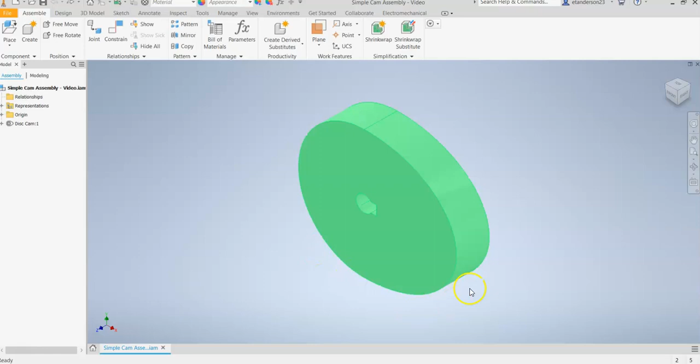We need the disc cam assembly, which should look like this. You need your lifter, and then you also need the cam case itself.

I've already opened the disc cam assembly. From there, I'm going to put some more objects in there to play around with. So I'm going to go to place.

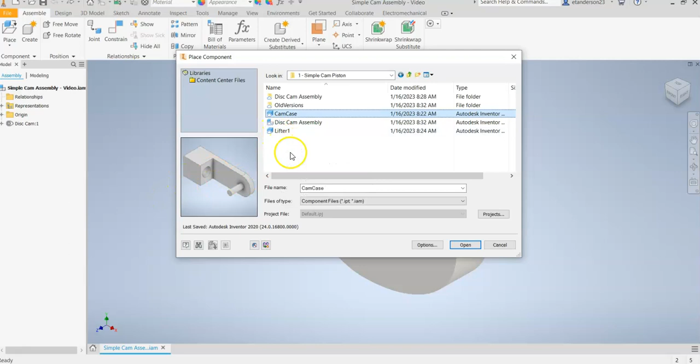I need to search for where I saved the cam case and the lifter. In your case, it should be under this PC, and scroll all the way down to your student drive. Because I don't have access to that, it's just in my Google Drive. So I'm going to click on cam case, and we can see an image pop up. I'm going to hold Control and click on lifter, and hit open.

That allows me to snag both of those at the same time. And then I will left click. I'm going to hit escape. So I have all my parts within the assembly itself.

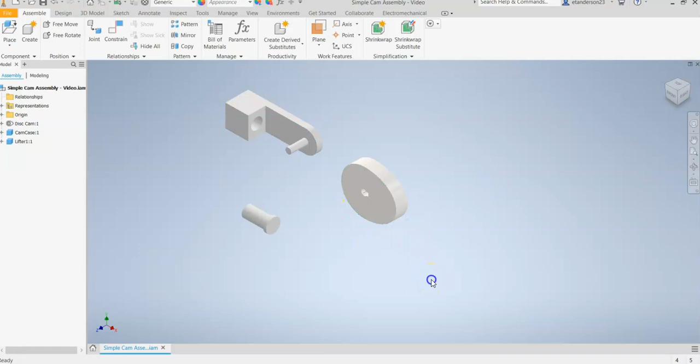Now, if you notice, if you grab these things, you can move them around. That's not the case for the actual disc cam. Now we want to be able to move it, so I'm going to right click on that guy and go to grounded. That's going to allow us to actually move that thing the way we want it to.

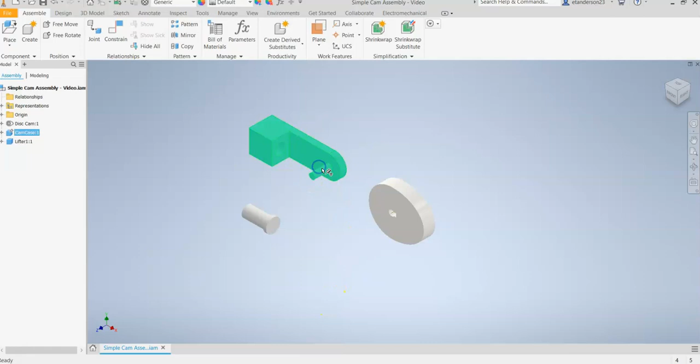Now for assemblies, you always want at least one of these things to be totally grounded. So I'm going to choose the cam case. I'm going to right click on that and click on grounded so that whatever I attach to it is going to be stuck in that spot.

So let's start attaching these. Kind of imagine this is going to be like a cheap version of a piston, where my lifter is going to go in and out of the cam case hole, and my disc cam is going to rotate around that peg right there.

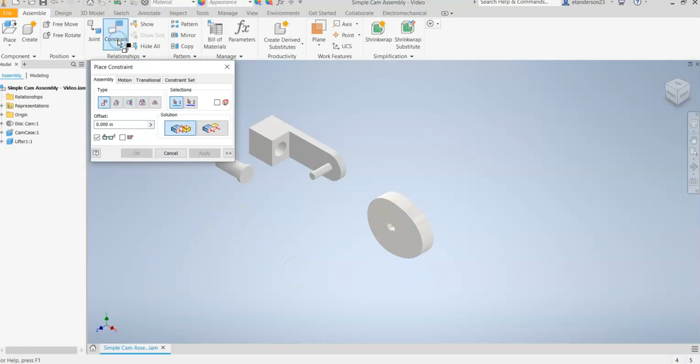So let's start off with going up to constrain, and I want to force my lifter to go inside of that hole right there. So I am going to highlight the edge of that until I get that nice little axis right there. And I'm going to lock it into the same thing on this side. I'm going to hover until I see that axis.

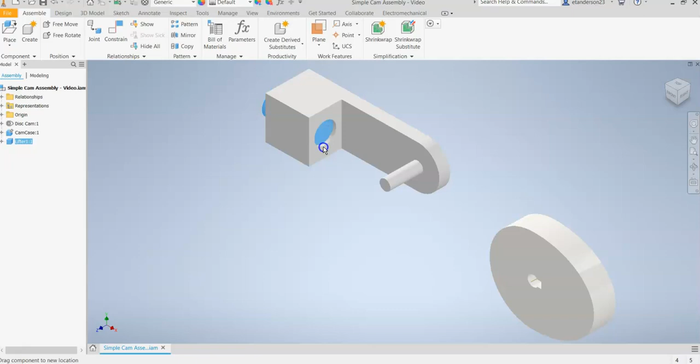And I'm going to say, okay, that works. Right? So my lifter can go in and out. It's not going side to side. Now, truthfully, it will go through, which shouldn't actually happen, but we're not super concerned about that quite yet.

Let's do kind of the same thing for our disc cam. I want that to go on this peg right here. So I'm going to click on the axis. I'm going to click on the inside hole of that keyhole, and notice it locks it right into place for me. That actually looks pretty good.

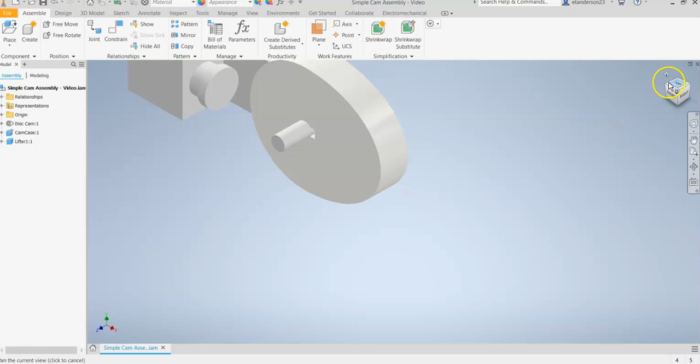So let's zoom out to my home view. Now we have a little bit of a problem because if I try to rotate this guy, there's a lot of give left and right because there's no constraint there.

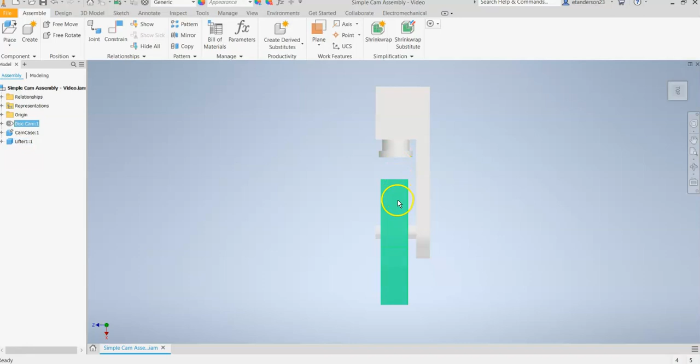So let's do another constraint. The goal of this is I want my disc cam to line up perfectly with that lifter right there, because I want them to come in contact with each other and actually be able to move and rotate.

So what I'm thinking is I'm going to get a constraint between the face of the case and the face of the cam. And when I select that, they kind of shoot together.

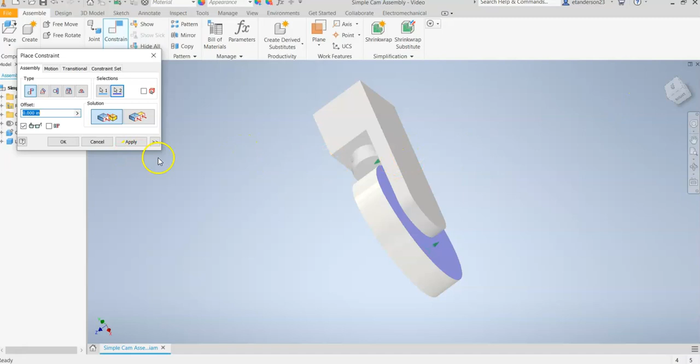But I can actually offset that so it's not directly in contact with each other. So maybe I offset it, like 0.125 or something like that. Just kind of eyeballing it so it's pretty close to being in the middle right there. And I'm going to hit apply.

And I know it's good if I can rotate it and there's no weird give or other weird motion. So that looks pretty solid.

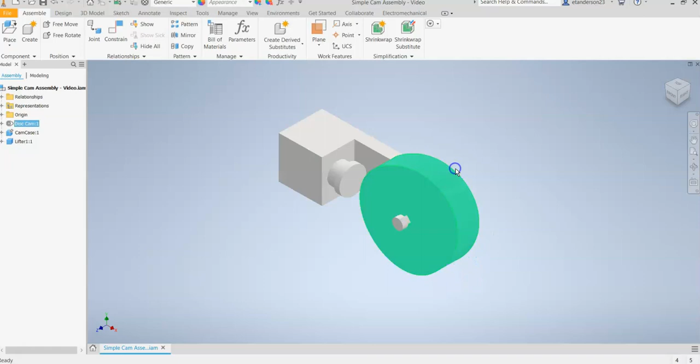So before we're able to animate this thing and really see the whole interaction, what I'm going to do is make sure that this face comes in contact with the cam. So I'm going to go back up to constraints.

Instead of doing a mate constraint, I'm going to select a tangent constraint and make sure that this outside tangent is connected, so that if I grab this guy I can highlight the outer edge of my disc cam.

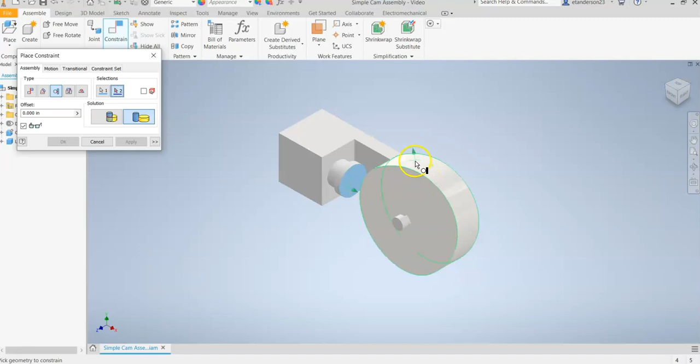Those two should remain in contact with each other while we do the motion. So no matter how I kind of wiggle this thing around, my lifter is going to move with the disc cam.

Now, one last thing that we need to do, seems to be kind of weird, but we need this to animate it later on, is I need to do just like an angle constraint to force it to change angles. And this one's a little bit weird.

I'm going to go over here to the disc cam, and I'm going to open up origin, because I want to see one of these planes. Now, you don't always have to connect the faces of objects together necessarily.

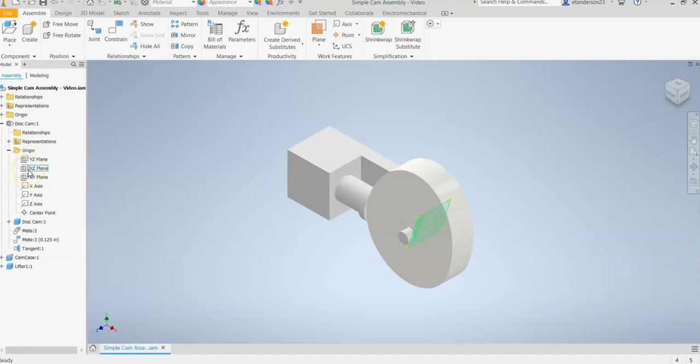Sometimes we can get away with doing like planes and things like that.

So I'm going to go to my disc cam. I'm going to click on origin, and let's pick, I don't know, let's pick XZ. And I'm going to change my visibility so I can see it.

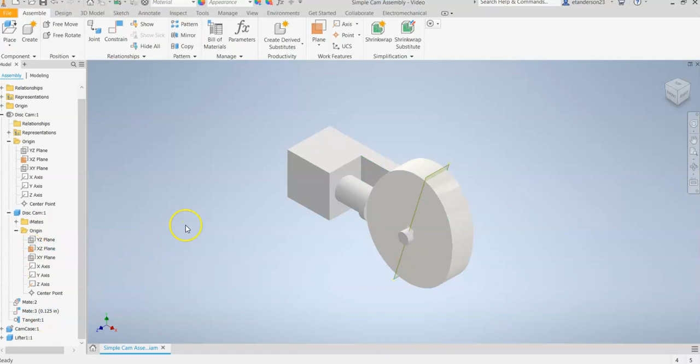So my last constraint, I am going to click on this top face, and I just want them to be parallel to each other. So I'm going to click on that face. I'm going to change my constraint to an angular constraint and change it to a directed angle.

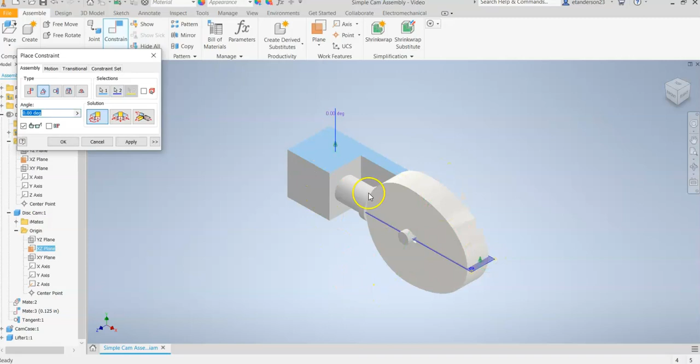And to connect it to the piece, I'm going to click on that work plane, and it should shoot to be 0 degrees. Now we can change that if we really wanted to. Probably doesn't matter a whole heck of a lot.

If you want 90 degrees, sweet, go for it. But I'm going to keep that as 0, and then I'm going to apply, and then we are good to go.

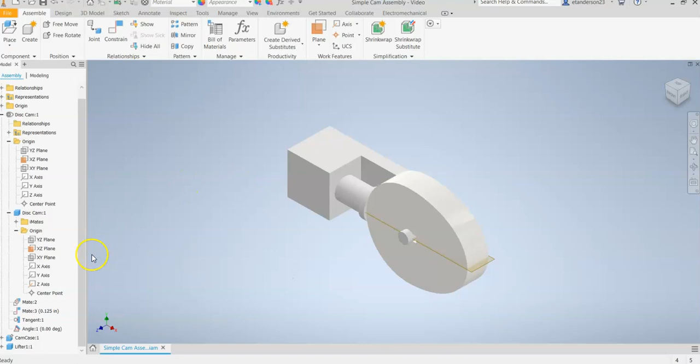Now we're ready to animate our piece, and if we want to make sure that everything is okay, we can kill that angle, we can suppress it, and we should be able to rotate that thing to make sure that it is actually working the way we want it to.